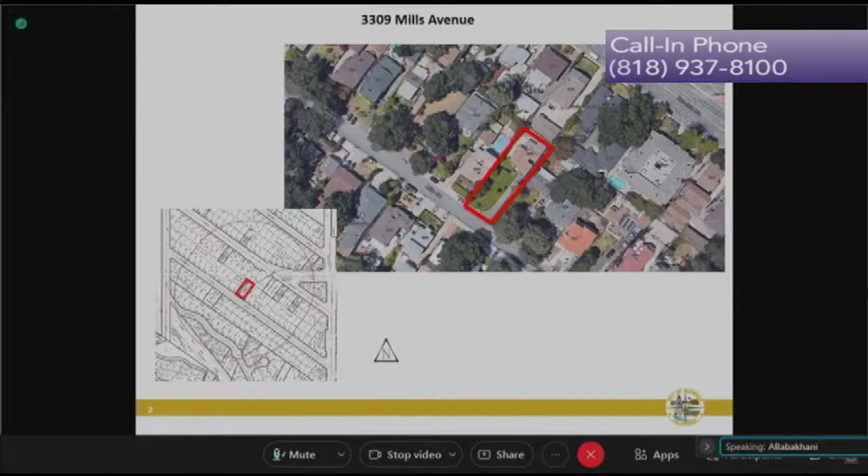The case before you is a design review application with case number PDR 2115380 for a proposed development located at 3309 Mills Avenue. The project site is a 7,300 square foot interior lot with frontage on Mills Avenue. The lot has a regular rectangular shape, similar to the majority of properties in the neighborhood. The lot is developed with an existing 1,039 square foot one-story house and attached carport built in 1938.

The existing house will be remodeled and converted to an approximately 900 square foot accessory dwelling unit, or ADU. The existing house, which is going to be the future ADU, is located towards the rear of this lot, and the design of this ADU is not within DRB purview for this project. The existing house appears to be altered and doesn't appear to be eligible for listing in the Glendale Register of Historic Resources.

It's therefore not considered a historic resource under CEQA. The project is to construct a new 1,570 square foot one-story single-family residence and an attached two-car garage towards the front of the lot, in front of the existing house, which is the future ADU. The property is located in the R1 floor area ratio District 2 zone.

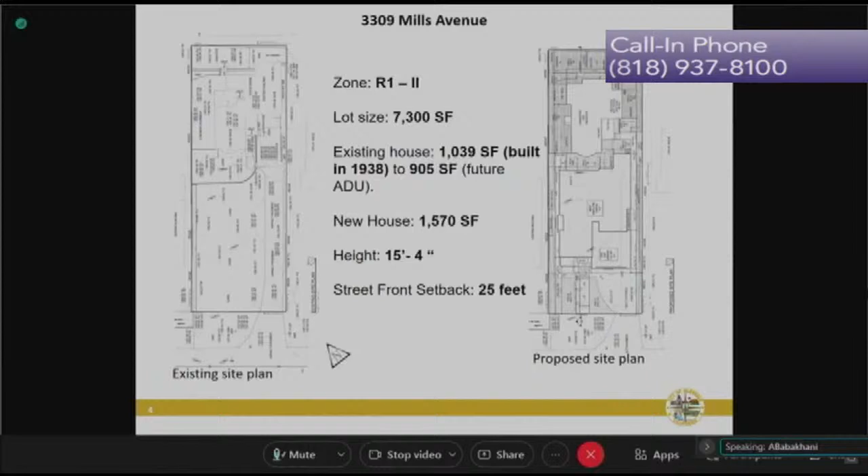The subject lot slopes gradually, as you can see in this section drawing, up along the length of the lot from the front to the rear. In terms of site planning, this project is appropriate to the site and neighboring properties because it follows the neighborhood context.

It provides the required minimum 25-foot street front setback and required minimum 6-foot interior or side setbacks, again appropriate to the neighboring context. The house will have a minimum of 6-foot distance to the proposed ADU at the rear, meeting the zoning code requirement. The location of the driveway is not going to be changed. The new driveway will have decorative pavers, and the location of the new attached two-car garage is also consistent with the neighborhood context and site planning of the proposed house.

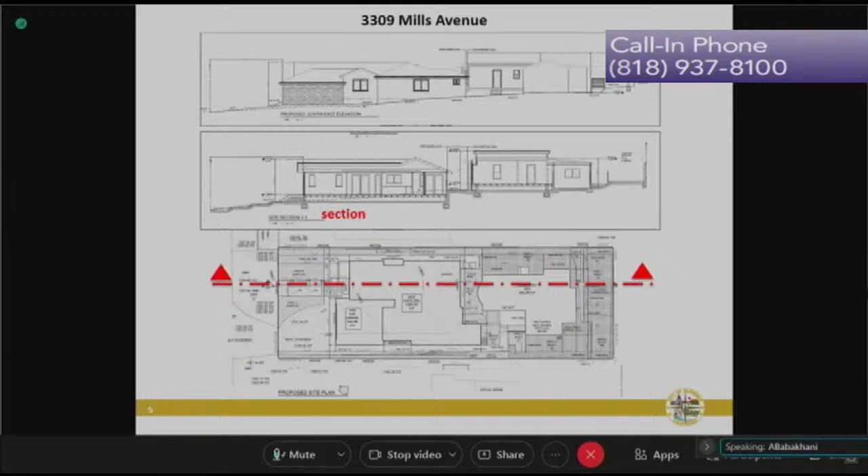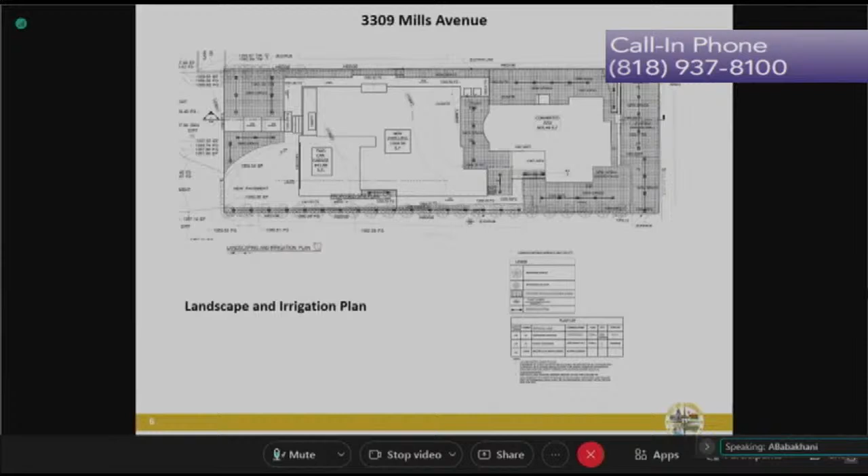The project will also receive new low water usage plants, which will complement the overall design.

In terms of mass and scale, staff believes the overall proportions of the new one-story house and the articulation of the facades are appropriate to the site, relate to the context of the neighborhood's 1- and 2-story homes, and reinforce the overall architectural concept. The overall height of the proposed one-story house will be 15 feet 4 inches, under the 28-foot height limit in this zone. The proposed roof is a combination of hipped and gable roof with a pitch of 5 in 12, which reinforces the proposed design concept and is appropriate to the neighborhood.

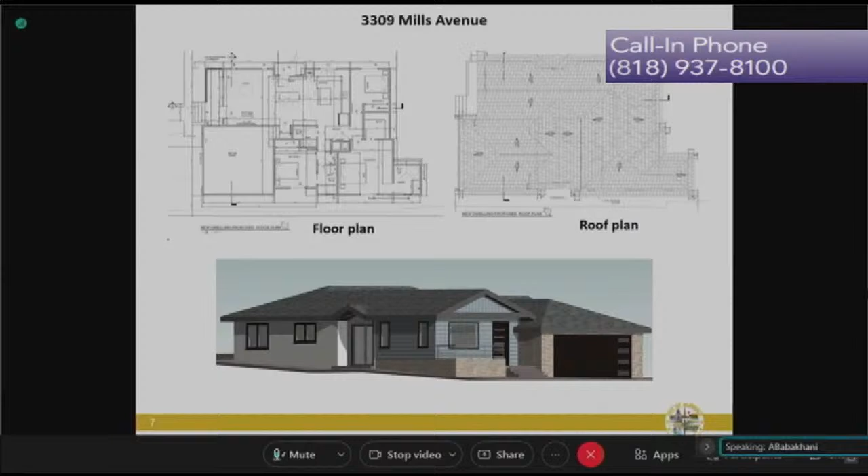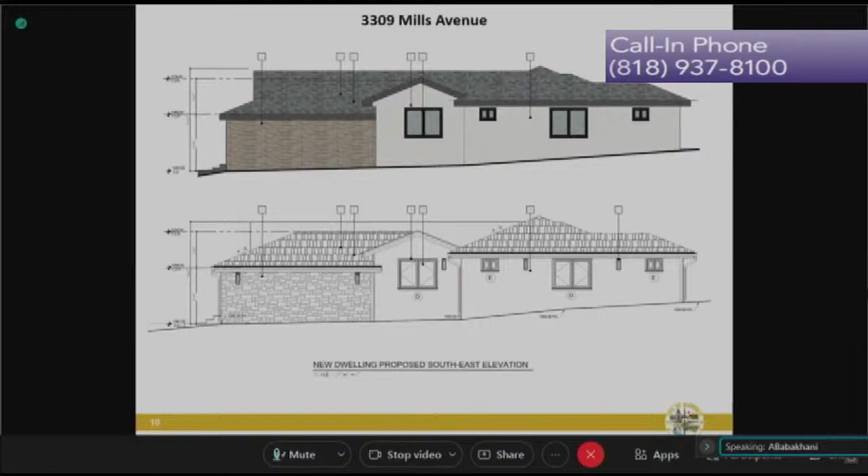In terms of design and detail, staff believes the proposed architectural details and colors are consistent and reinforce the proposed design concept, which is appropriate to the neighborhood context of various architectural styles. The front entry porch is well integrated into the overall design.

The new windows will be fiberglass windows with a dark color, recessed in the wall with sills and wood surrounds, representing the proposed architectural style with an appropriate combination of fixed and casement windows. The location of gutters, downspouts, trash storage, and the air conditioning unit are appropriate and out of public view.

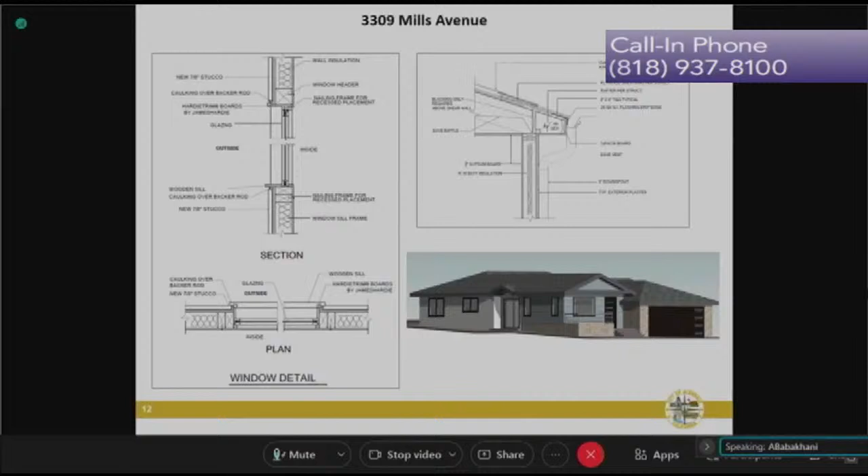In conclusion, staff recommends approval of this design review case with 3 conditions. The first condition is for the landscape plan. Plans have been provided showing new planting with low water usage. However, a condition of approval is added for providing a landscape drawing in compliance with the state model water efficient landscape ordinance, prepared and certified by a landscape architect.

Condition number 2 is for the boundary walls and/or any gates, because the drawings do not clearly identify new or existing boundary walls, gates, or any other walls. A condition of approval is added to provide details and drawings of any existing and new perimeter walls and/or gates in appropriate location, style, color, and material with respect to the site planning of the subject project and neighboring properties.

For condition number 3, the proposed plans show the location and details of the light fixtures. However, staff believes we should have a condition for reducing the number of proposed light fixtures on the side facade, the southeast facade, to avoid over illumination. This concludes my presentation, thank you for your attention.

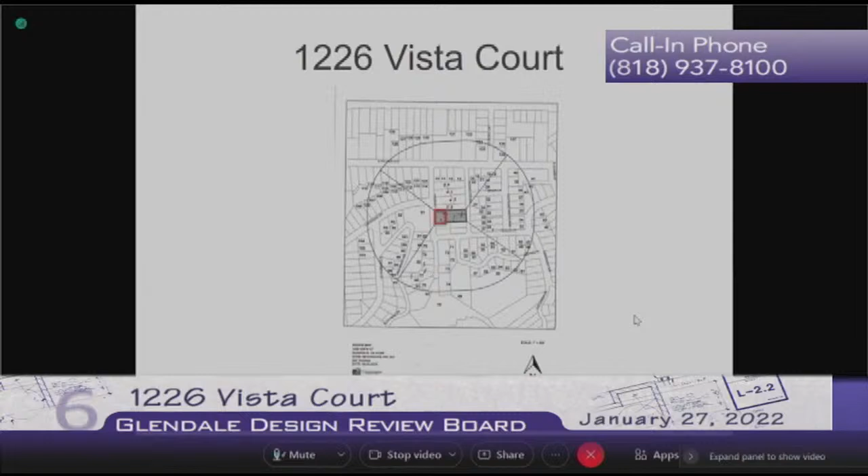Okay, so the first slide is a reminder that this is a remand by the City Council to the Design Review Board. The project address is 1226 Vista Court. Here's a little location map, aerial view.

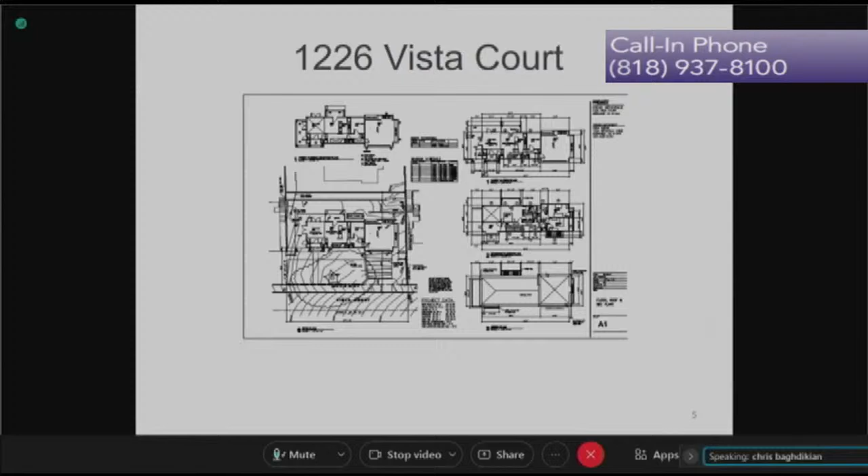And these are the new plans. But better than discussing the new plans, I'd like to show you the relationship of the new compared to the previously reviewed project. I'll get back to these as necessary.

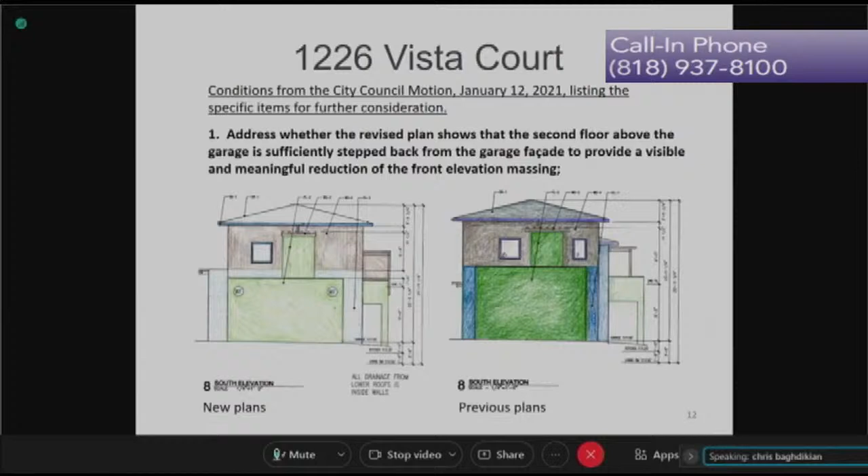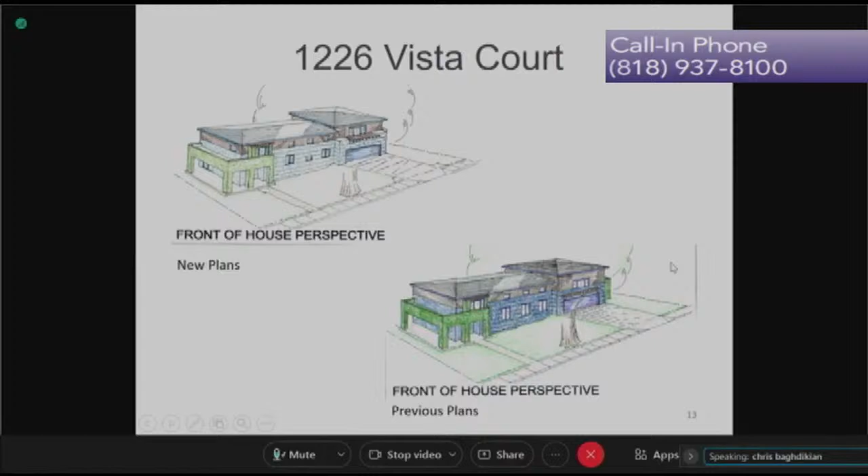Continuing further down, the second condition from the City Council was for the applicant to prepare a line of sight drawing, to address privacy issues from the second story balcony that's located almost centrally in the new house. So the applicant has prepared a line of sight analysis.

What staff suggested to the applicant at the time was to provide a screen wall on the south side of the balcony to reduce the view towards the neighboring property to the south. In staff's opinion this addresses the issue partially. There were concerns at the design review board meeting also regarding privacy with respect to the adjacent property to the north. A staff suggestion is that a screen wall also be added on the north side of the balcony to further reduce the privacy issues related to this balcony. This is recommended as a staff condition, and we'll get to it towards the end of my presentation.

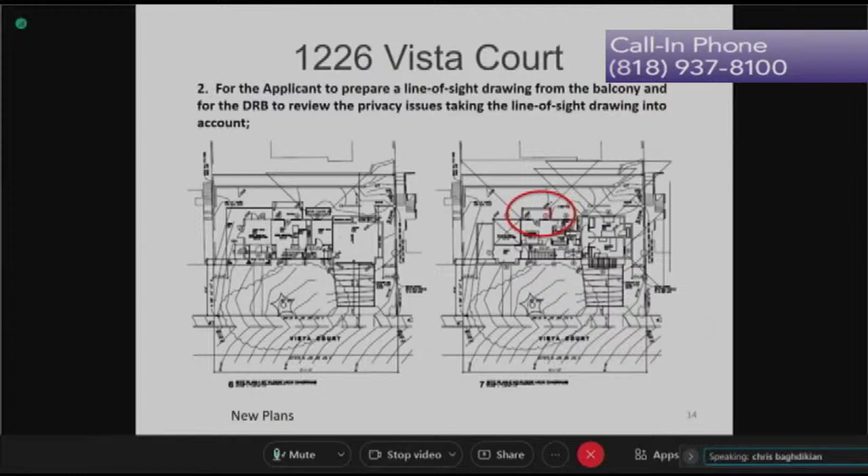The next plan: Council's condition number 3 was for the applicant to revise the landscape plan and make it more friendly towards the existing oak tree, which is located near the sidewalk. It was pointed out when the project was reviewed by the design review board that at the base of the oak tree, gravel was proposed along with ground cover and hedge material, which altogether were not friendly to the oak tree.

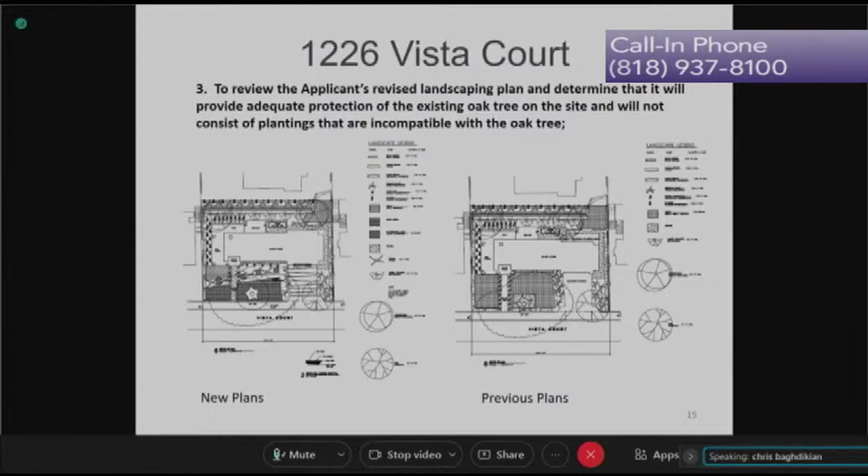Given our current situation, what I did is the following: since it's a little hard to compare photographs of the actual color chips, I brought the before and after so that the board and the public can see them side by side. On my left is the new color proposal. On my right, the one I'm waving, is the initial proposal that was reviewed and commented on. In staff's opinion, the revised color palette is significantly lighter and appears to be okay.

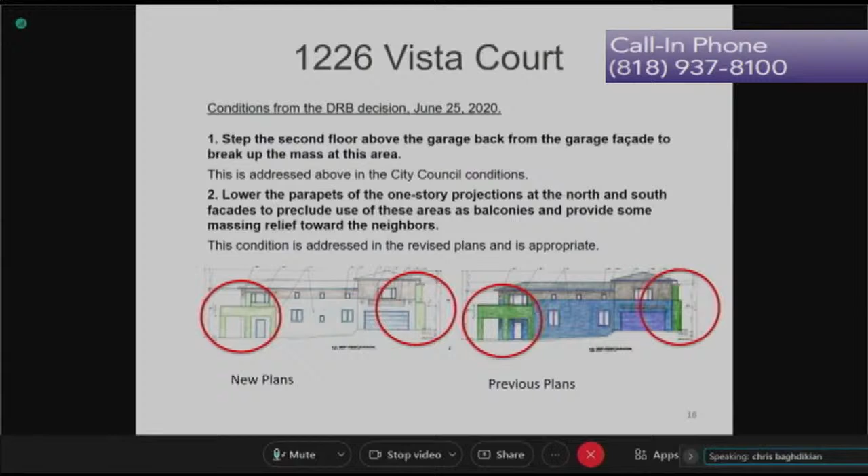Condition 3 from the design review board was to revise the drawings to correct inconsistencies. At the time the plans were presented, there were inconsistencies between the plan view and elevations—some windows were shown on one but not the other, or not in their proper location or number. These have been fixed and the plans corrected and revised.

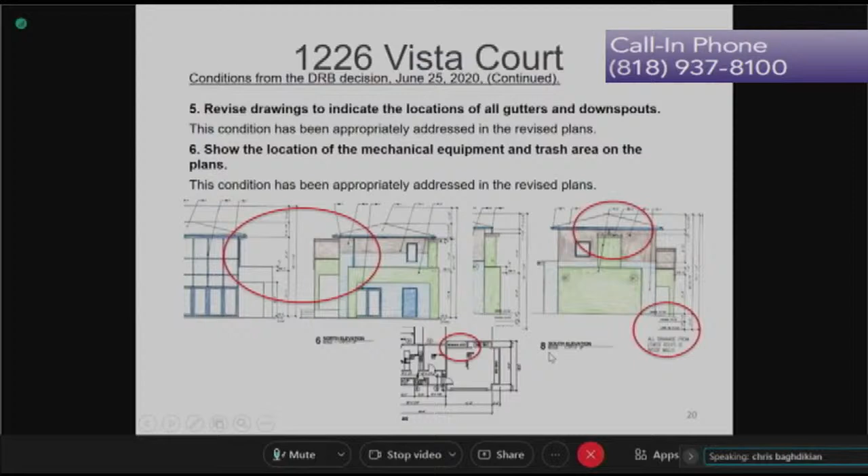Condition 7 was to revise the color palette to provide a softer, less saturated color palette. The color palette has been modified, and staff's opinion is that it's better now and it complies.

Condition 8 was to revise the landscape plan with materials more friendly to the oak tree. As discussed earlier, this has been accomplished with a revised landscape plan and changes to the plant materials and ground cover at the base of the oak tree.

Condition 9 is to obtain a permit from Public Works Urban Forestry to prune the oak tree. Since this is an ongoing condition which would apply during construction, in the permitting phase, during construction, and subsequently, we left the condition in place.

Condition 10 is to specify a decorative finish for the driveway. On the right side here, we see a concrete driveway. The revised plan on the left shows gravel bands within the concrete driveway, and this satisfies the requirement for a decorative driveway.

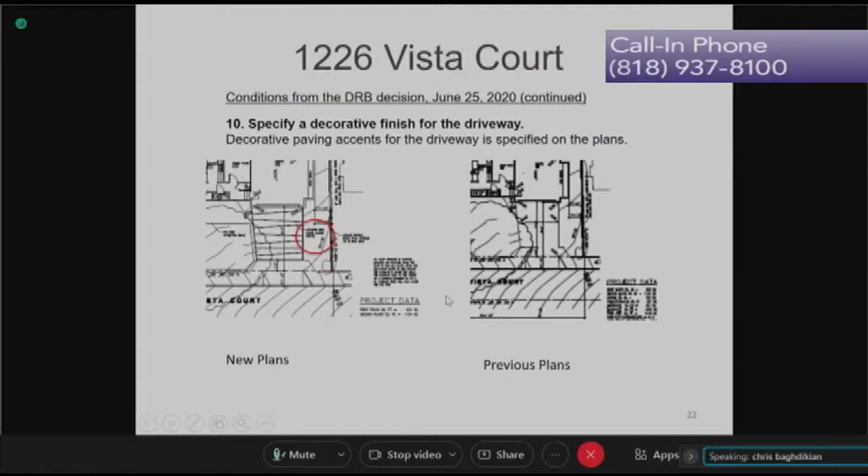Condition 11 relates to existing fences and block walls located either along the sides in the front yard or a little further down. Some of this has been addressed already in the revised plans, but staff's opinion is that this condition should remain so that we can address it during the plan review process if the project moves forward.

Condition 12 relates to the existing CEQA document applicable to the property. There's a mitigated negative declaration that applies, and the mitigation measures relate to putting in place traffic safety measures during the construction phase, and also the ongoing protection and maintenance of the oak tree. Since these would apply during construction and beyond, we think it's appropriate to leave this condition in place.

Having said all this, I'd like to come to the new recommended conditions. The first one is to address the privacy issues from the second story balcony. As I said, a screen wall was proposed on the south side of the balcony, and staff thinks a similar screen wall on the north side would help alleviate some of the privacy issues, hence condition number 1.

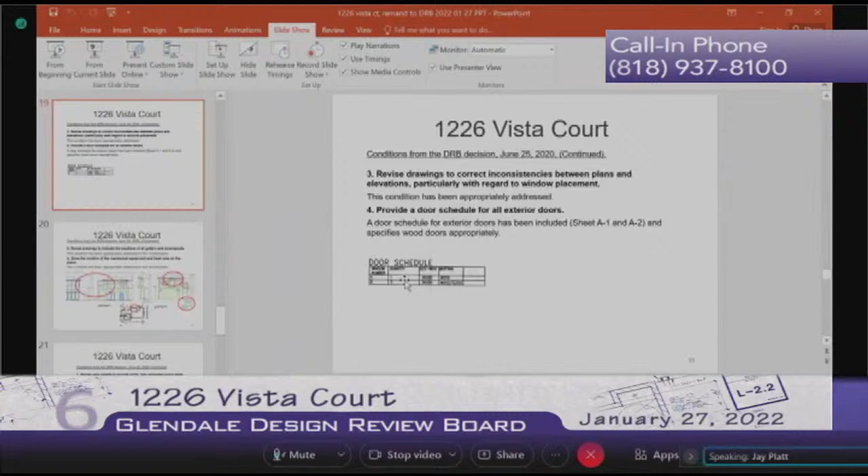I can help clarify a little bit. The council did not deny the project, but instead remanded it to the board to just verify that the conditions that the board imposed were successfully implemented.

We spoke with the city attorney today just to make sure that we at staff level understood this, and he specifically tells us that the board's duty tonight, or purview tonight, is to look specifically at the conditions and address those. If you have comments on the conditions, if you think another condition is required to better meet one of the conditions that were previously placed on the project, you can do that, but we can't step beyond those topics.

Now, of course, I believe we'll hear from members of the public. We received a number of letters, and some of those raised some of the same issues that the board has considered before and that council also considered, but we can't step beyond what the city attorney has given us based on the remand from council.

So if I'm hearing you correctly, this is essentially not a de novo hearing. This is really just a verification hearing, as it were. Yeah, I don't want to speak legalese and say it's not a de novo hearing, but that's the direction from the city attorney.

Board Member Welch, DRB board members, we have confirmed with Mike Garcia, the city attorney, that your purview would be the conditions set forth in the council motion.